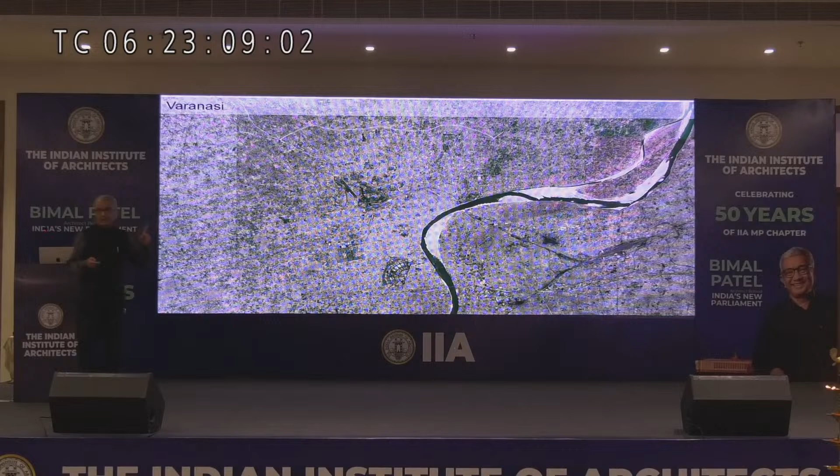Unfortunately, when these LED screens are used, the slide gets distorted a little bit. The projectors work much better. So pardon me for that, it's a little distorted, but the whole slide is here.

Just to start with, this is Varanasi, that's the Ganga flowing from down upwards. You can see the city all around here. That's the entire city. That's Banaras Hindu University here that you can see. And we are interested in this little square here. Okay, that's on the banks here somewhere, at this place, as you can see. And that's on the Ganges. This is the area in which the Kashi Mandir is.

You can see this is entirely a dense walled city, and that's the square we are interested in. Here is where the Kashi Mandir is. That is out here, you can see, and that is the Gyanvapi Masjid. You can see surrounding it is a dense settlement of the old kind. It's become denser over the years. There's lots of small gullies you can see.

You can see one important road on top, which is a 40-foot wide road. It's not very big, it's full of traffic usually. And there is the Ganga river there. At the far end is Manikarnika Ghat. This is our most important cremation ghat. And inside all of this is lots of different temples and various things happening there.

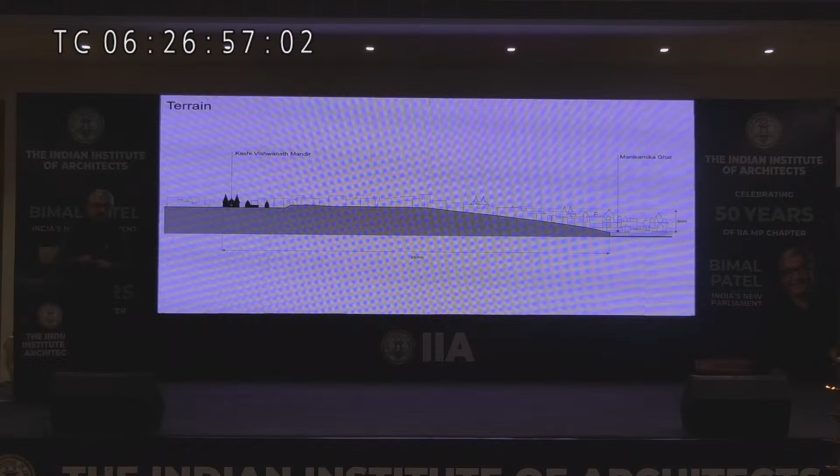It was meant to be a temple on the top of the hill, but there was a great desire to connect the mandir with the ghat there, and for the approach to be from the ghat, because people can come from there the best. You can also come from the gullies or the street, but a lot of pilgrims want to come from the river, by boat, and then climb up to this place. So our brief was rather brief, it didn't have much detail in it. Just saying we want to make a connection between the river and the temple, so it was sort of an open-ended brief.

There was no absolutely fixed program. And of course we want to make lots of pilgrim facilities and want to ensure that this area has enough security and safety for everybody. So these were the sort of very rough things we were told.

So if you look at the precinct all around, it's quite a messy place. Not all of it is ancient - actually, very little in Varanasi is truly ancient. Varanasi was built a lot 400 years ago, and lots of the buildings you see on the ghat are no more than 250 years old. Historically, it used to be quite an open area earlier.

But lots has been built, and subsequently you can see lots of construction has been done. There's lots of concrete, lots of brick, lots of buildings have been added on. This was an old place which got denser and denser and denser. So it's densely built - that's really the important character. It has very narrow lanes, has very little infrastructure there. It's quite a mess actually.

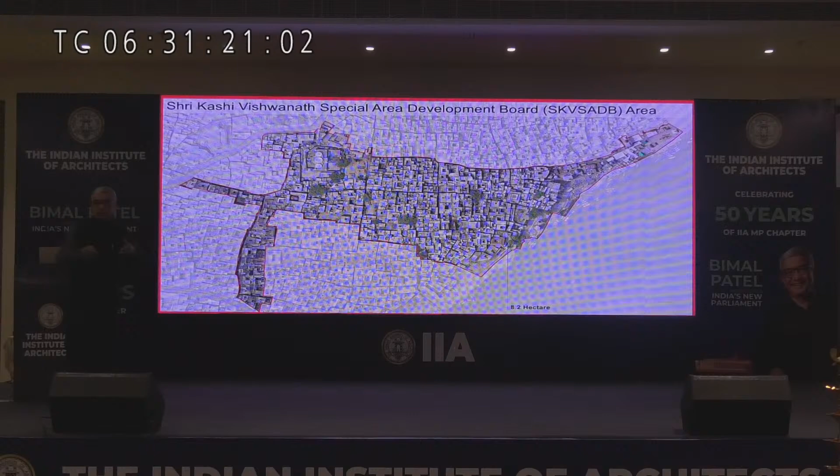This was an important first step, which is what we told them - that unless you do this and create a separate authority, you have no jurisdiction except on the streets. So you have to do this, and that was a good thing. So we prepared a master plan for this area.

As usual, we start with a sort of measured drawing of the area. These days you actually start off with a Google image, whatever you can get in your hand, and you start drawing, because drawing tells you what you must look for more.

So we started with this. These days, 3D printing technology allows a lot of things. Google is a wealth of information - many of you might already be using it, but it gives you three-dimensional information. So this entire thing can be built up with just what you get from Google. There's no survey done for this, you just download it from the net and build something like this, which is truly amazing, and we should use more and more of that.

Then we started the sketches and started seeing what's possible out here, how much area do we need, how do we connect the river, those boats out there, what are the important things. You know this process, I don't need to explain it to you - you keep drawing it, people keep questioning it, showing it to the clients, etc.

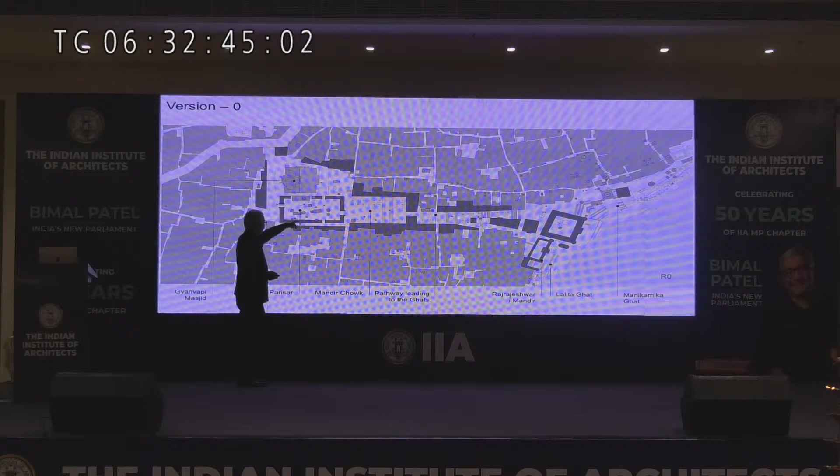And we came up with a version 0 master plan, which said our basic move was to create a sacred space around the temple, create a civic space, and then create a walkway leading all the way down. As soon as we did this, simultaneously the process was going on for purchase, not acquisition, of the houses in that area. Demolitions had started, and this was the model we came up with first, saying something like this can be done. So this is really the very first rough model that we did.

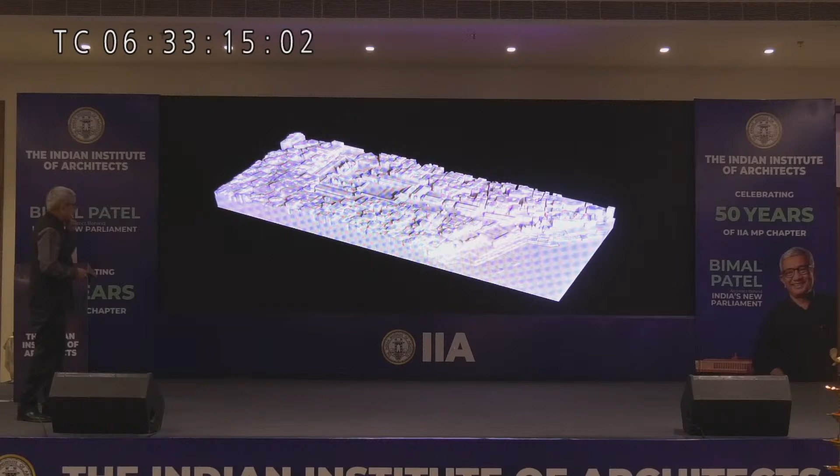But the demolition started, and we found that in many places there were temples hidden away inside the dense settlement, which became available. And we had proposed buildings where there were temples, so now the master plan had to evolve and change.

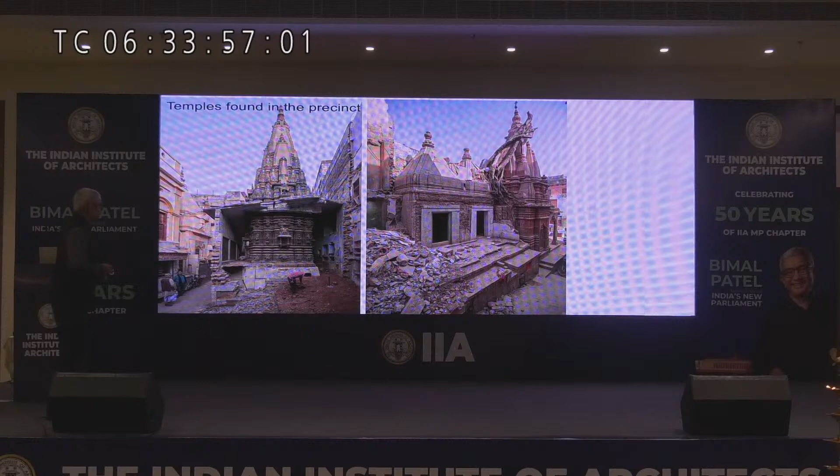As you can see here, this was not done in ancient times 300 years ago - this is done in modern times. So it's the same people who were living there who have really abused that area, it's not as if this is abuse since time immemorial. You can see here a concrete slab resting on a temple, these sort of things. And we found all the temples wherever we had proposed.

Some basic ideas were in place, but all the buildings were taking different shape as we got more data from the site. Remember, it was not as if we had all the data and then we designed - we were designing, collecting data, and going ahead. Here we thought version 7 was perfect, and by this time actually construction started. Then we decided that we were going to change something.

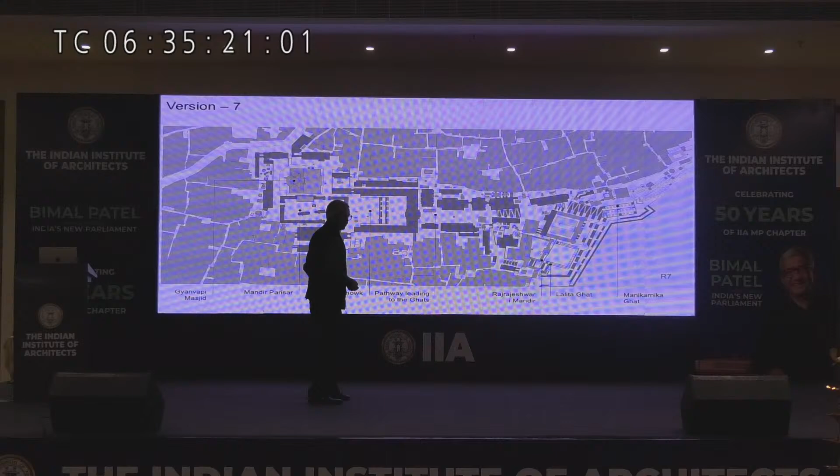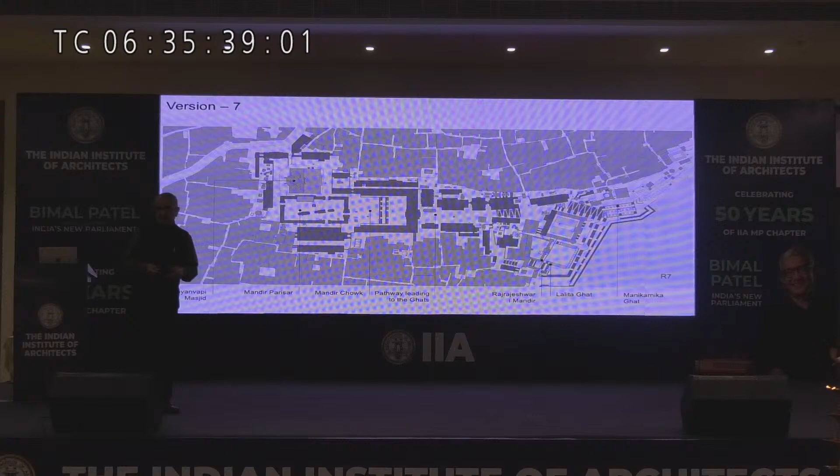You can see that the real key issue was when you come from the boat here, there's a pinch point, and from that pinch point you have to go inside. One day I was on the site when somebody suggested that this is an old structure, but it's not that important - suppose you remove it, what would happen? It immediately became clear that if we removed that structure, which was not an old ASI structure and did not have much religious significance, we could really change something.

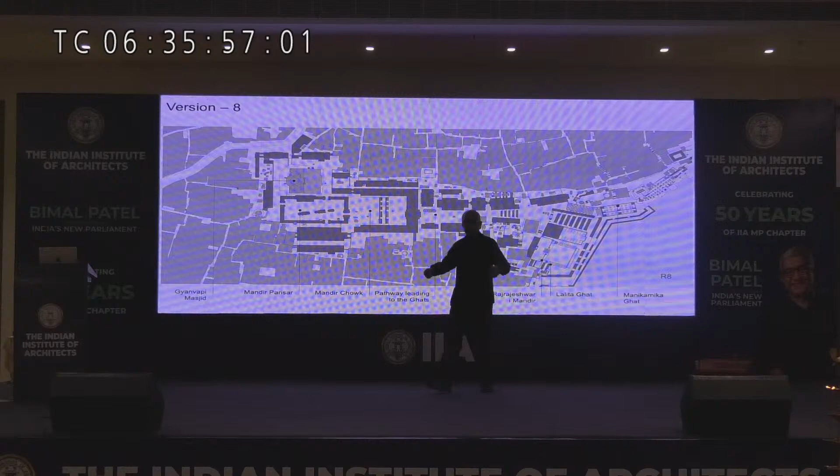So this was the old structure that was here, and if we removed it and made it smaller, we would get better steps going up. So from the ghats, we could climb up a grand staircase and go upstairs, up the hill. We made a model that looked like this, and said you come here somewhere, go up. But half the old structure we kept, something that looked like the old one.

Then we made an even bolder change, and we said, remove it completely. We removed the whole thing. This is what you get—a really grand set of steps going up. So this is where it evolved.

By this time, mind you, the construction had started, so this had to be additional work and had to be approved by somebody imaginative at the top, which we had. So that's the final master plan as built today, and you can see what it is.

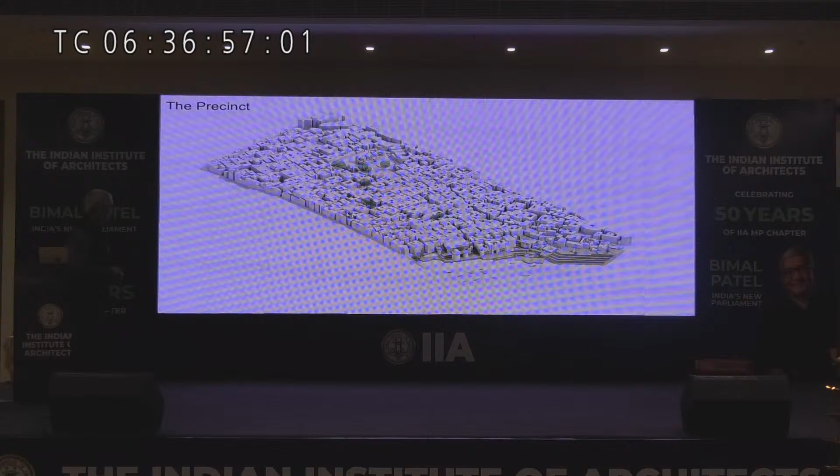Now let me explain to you. You can see the plan of the buildings—let me explain in a little more detail. This is the precinct as it was, and this is what we have transformed it into. So I go back once—you can see what it has been transformed into.

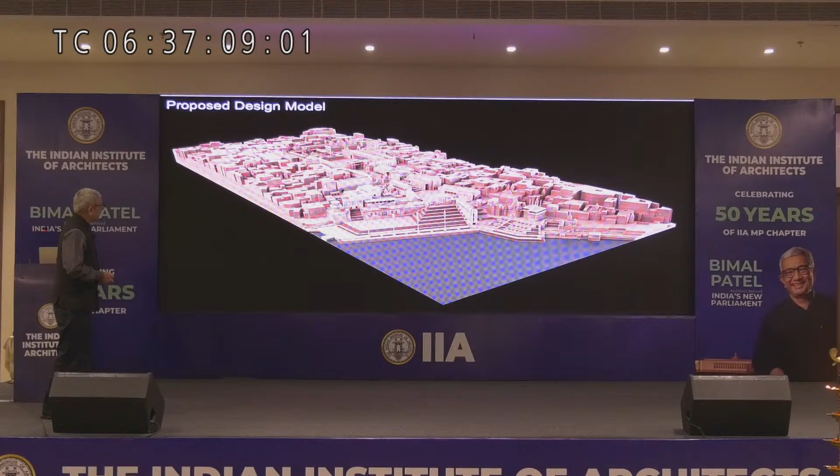Here's another model of the same thing that explains what the buildings are. This was a dynamic model, kept changing as we went along. Actually, the first one, the thermocol model, was the big one. Then we kept refining this. Here you can see some more of it.

Okay, so let me explain the precinct plan here. Now, this temple is actually a very tiny temple. How do you bring it to the foreground? How do you make it center stage? How do you give it some presence there? That was the real architecture problem—I mean, you understand very well, it's a tiny temple.

So we decided to adopt a strategy that is used in many temples all across the country, that you make a parisar around it, a sort of an arcade around it, create a sacred space around it, and that gives it a little more presence, frankly speaking.

This, compared to the mosque there, needed to have some space by itself. So it was like this, right? And this is what it looked like. This was the actual area of the temple—there was nothing more beyond this.

So then we took this and said, okay, that's the axis, but we shouldn't use that axis—we want to go down this way. So we took a square like that and straightened it out, so it sits a little bit tilted inside that square. Then the Gyanvapi well is there, so we added that in, and this became basically the dimension, 75 meters by 42 meters, within which we could create this parisar.

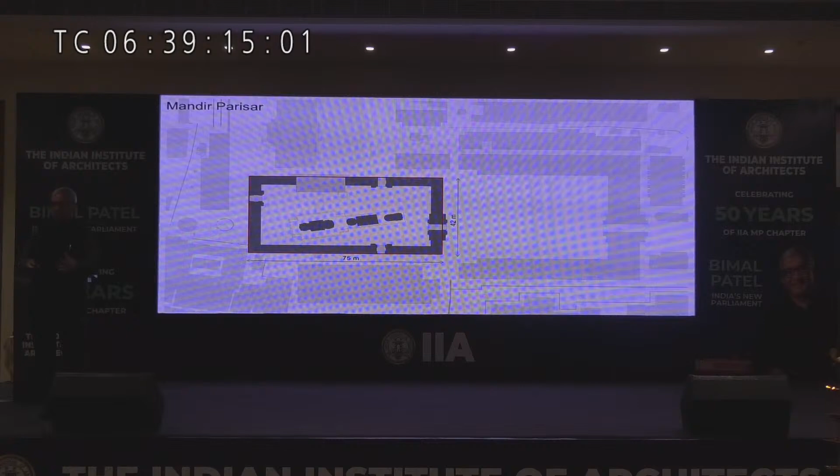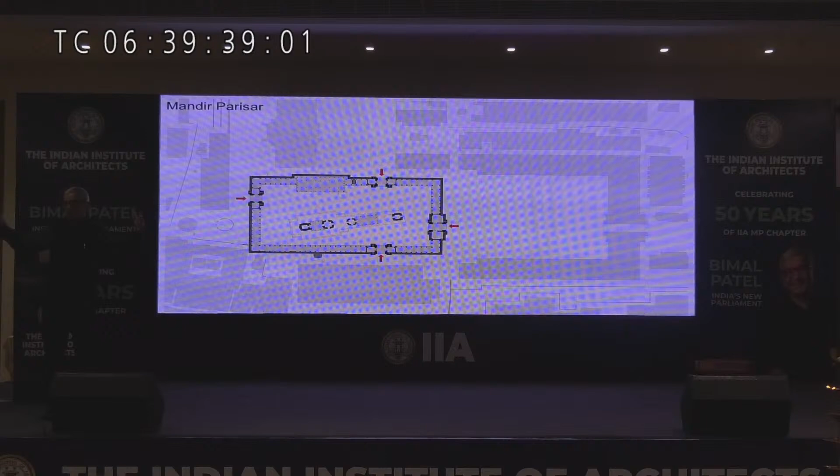So we started working with a temple architect, and he was associated with the person who was going to actually manufacture the stone material. So we started drawing up—he knows what modules, he knows how this works, because all the stone is going to be cut in a yard in Mount Abu and then transported to this place and assembled on site, because if you want to do this fast, you cannot do it there. It's actually made all over—it's a marvel of technology that you can do this today.

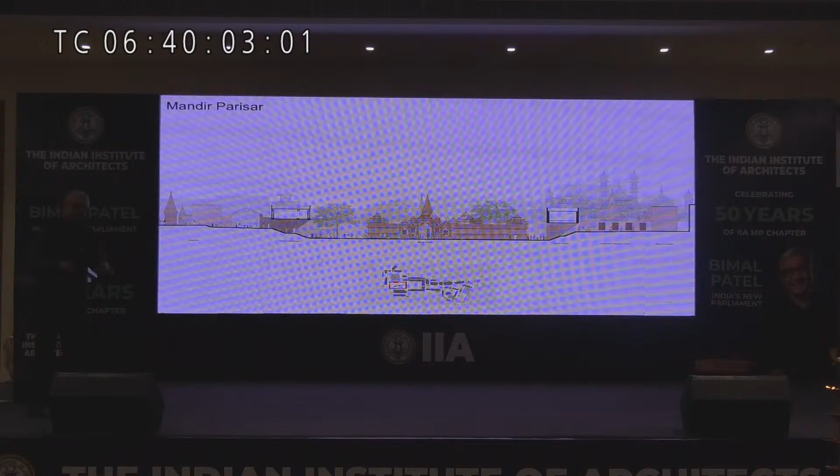And so that was the temple, that was the parisar that was designed. You can see the gateway. We worked on this with the architect—I could say things like, listen, I don't want so much, leave the middle a little blank, let's keep a heavy bottom, heavy top, and these are quite amenable. But he knows how to turn it into reality—so that was the actual design.

Then this is as it is built. You can see this is part of the temple, the gateway on the left hand side, here's the temple actually, and you can see the parisar all around. Inside there's marble flooring. Here you can see again the temple and the space around it.

Here's another view, the main gate where you enter from—that's actually a lot of space inside, gives you some sense of it. And all of this is actually new—it's all CNC cut stone. And here's all of this.

The gates are all new. All of it—the basic pattern and decoration was done by the temple architect. The rest of it was done by us to try and put it together.

Then outside the temple, we decided to have a large open space. Now the topography of this, I already told you—you climb 100 feet and then you go down, so there was one upper level, one lower level. We had some steps there, and many people come to this place. There was no place to sit down and spend some time—earlier you just pushed right through.

Even now there is a bit of pushing through, but if you wanted to sit somewhere and wait for a while, there was no place. So that's what the civic plaza is for, Mandir Chowk as we called it. That is formed by this U-shaped building that we put here, which has the temple trust. We said it could have the trust offices, some shops, maybe a handicraft shop. Really the program was made on the fly as we were going ahead.

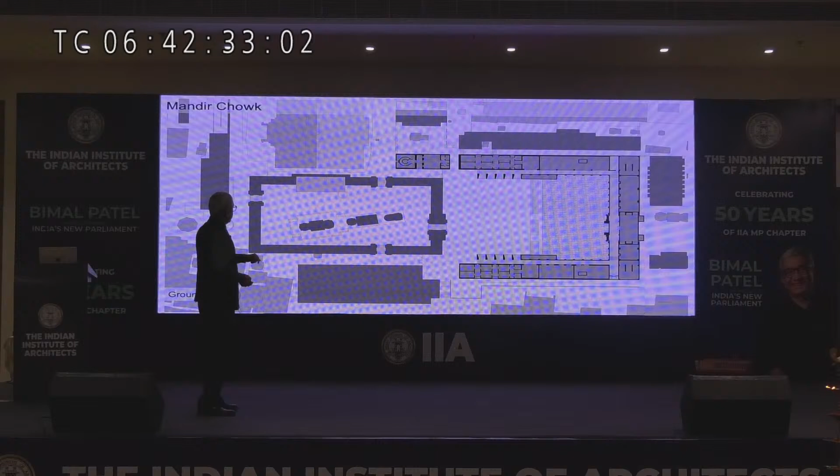Here you can see this is the lower level, the level of the temple. Outside, on this side, these are just toilets, washrooms for people to use. You come down those steps, and so it's just holding that space. Really its job is to create that middle space.

This is the level above where you arrive actually. That's one floor higher, and there's an arcade, there's an emporium, that's where shops can be. That is what was imagined. And then above we could have an exhibition gallery and various such things.

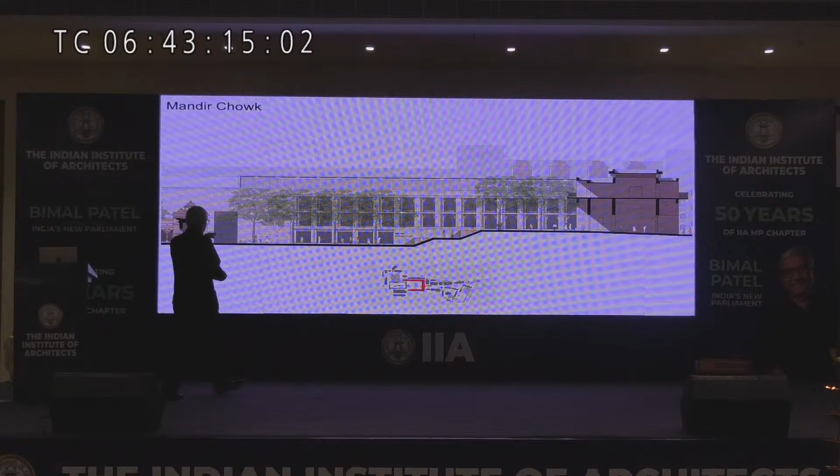That's a section. Through that civic space you can see the key diagram below, the red one. It shows you the arcade at the back. You arrive at this top level, climb down the steps, and those gaps behind here are where the washrooms etc. are. So these are essentially to create facilities for people.

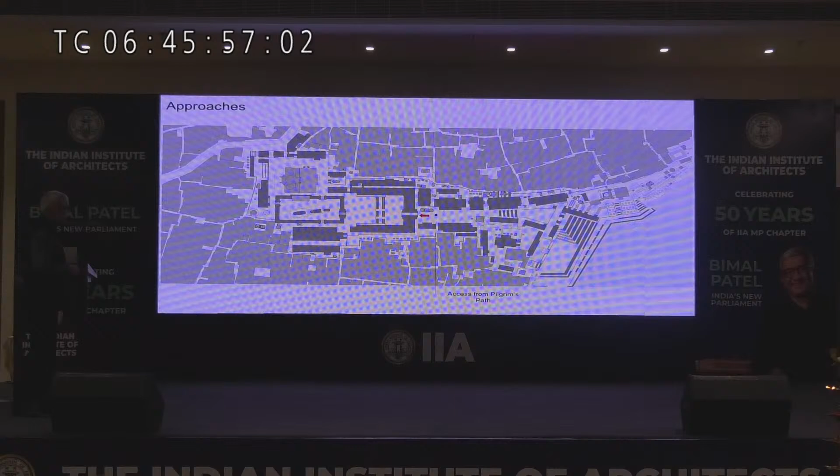This was the route for the pilgrim's path from there. And this is the area - you can see the gate here lining up with the axis of the temple there. So when you came to this gate, that's what framed the view. The whole point was to come up the Ghat, and at every point your journey is punctuated.

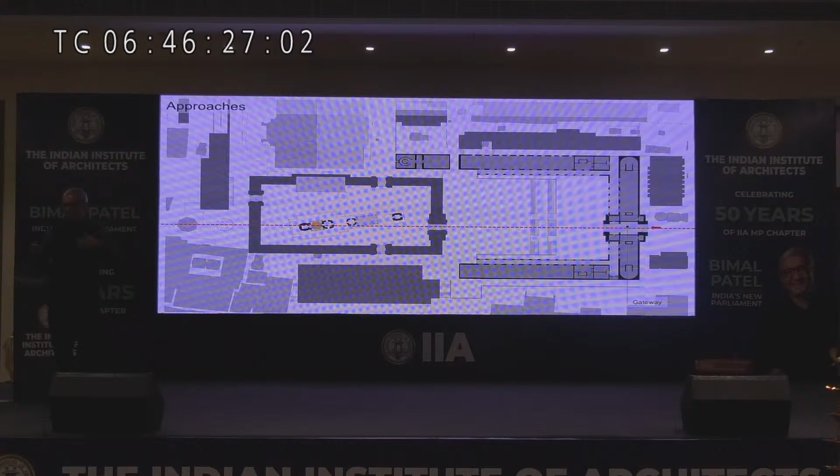First you're at the Ghat, then you see the gateway from the river, then you continue climbing up, full round, come to the next gate, you see the temple, then you come to the Parisar gate. There are 3 gates that lead you up essentially, and that's the gate you would come to. You see the temple at the back.

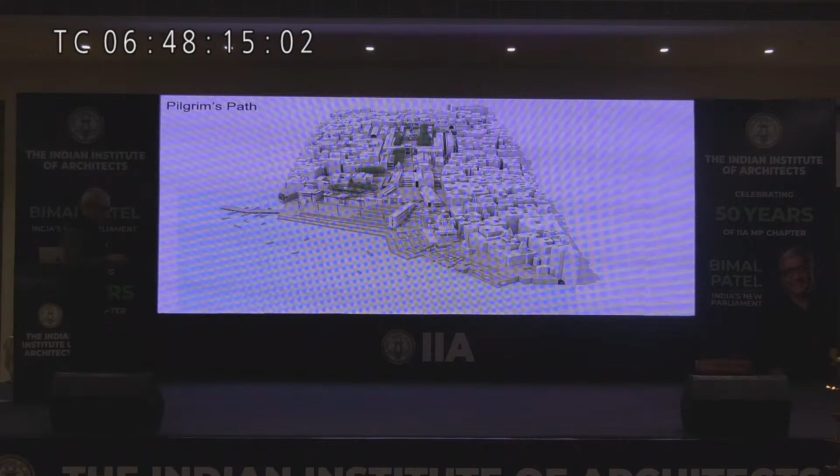And then the first gateway you can see, the second gateway, and the third gateway is right next to the temple. You slowly climb up and progress towards the temple. Here's that whole route, some early sketches at that time. We were trying to figure out what that route would be like.

The most important thing was the tourist and pilgrim facilities. So here you have a tourist facilitation center, then you have the Suvidha Kendra for Yatris, where you can leave your shoes, leave your telephone, mobile, etc., and go up. There's a food court, there's a guest house, and two more, because there are lots of tourists, so you have security to be managed. So it's lots of logistics of this sort.

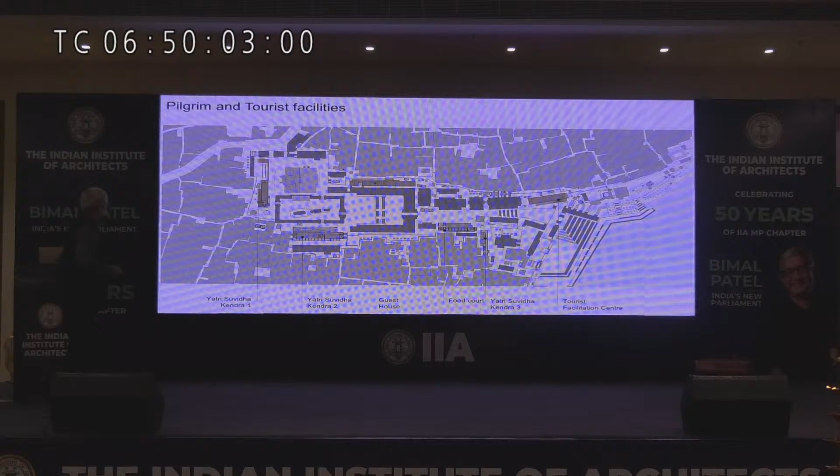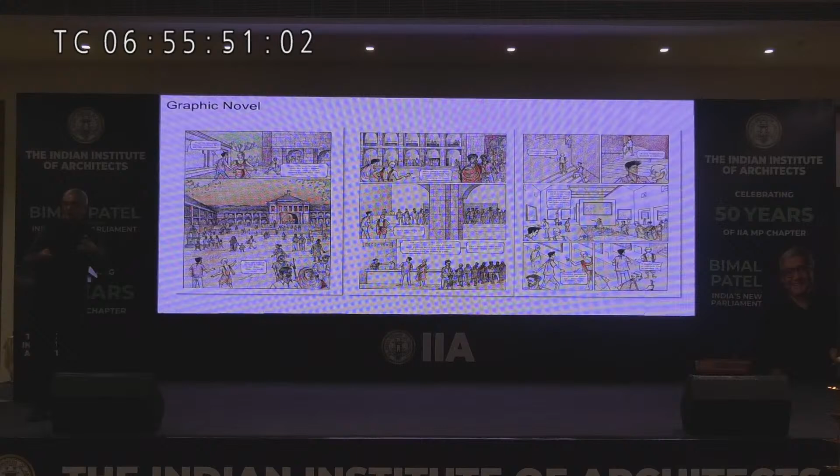So here you have a boy, a modern looking boy who comes into Varanasi and is wondering why this place is like this. He meets this old man who takes him around the city and shows him the mess that it is in. Then he goes to the other side of the river, takes a dip, and when he comes out, everything has been transformed. So this was just a fun way to explain the project to people. And here you have the boy and the old man in the new Varanasi.

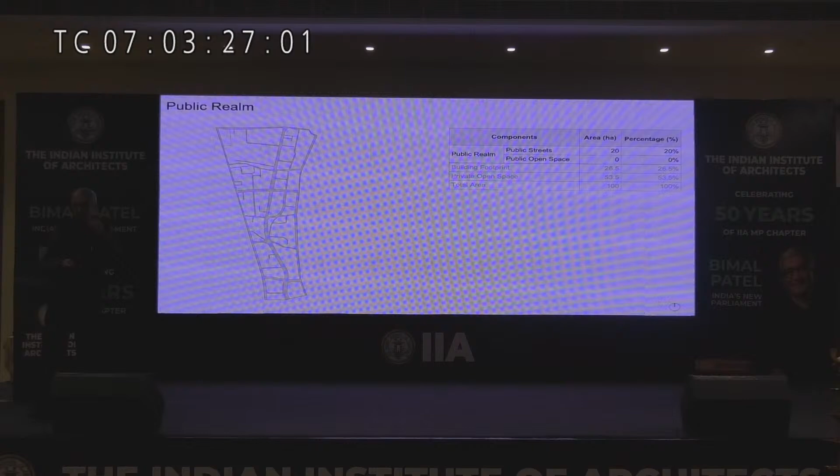But in the case of Ahmedabad here, we have 20% of land in the public realm. Hold that number in your head. That's just 20% in the public realm.

The next category we must ask is what is the building cover in a city. Like in a forest, you ask what is the forest cover? It might be designated forest, but what's the actual forest cover? You count how much canopy of trees there is. Well, we should ask how much of the land is covered by buildings. Why? Because it tells you how much ground floor space there is in the city, and ground floor is a valuable commodity, which is why it's priced high. Anything that is valuable to people, you should try to maximize.

So this is also a category you should maximize. Another reason is that if you have a larger ground floor, you can stack up more floor space without going too high. So if you decided your city will only be 4 or 5 floors high, and you had more building cover, you would put up more floor space. You wouldn't be forced to build tall, essentially, if your building cover was good.

Hold that number in your head, it's 26.5%. The remaining 53.5% is very familiar and very particular to Indian cities. Not many other cities in the world have something like this. It's all this private open space, the space around buildings, inside compounds. The reason it's left open is because the bylaws require you to keep it open. Because in a center city area like Ahmedabad, if the bylaws did not require this, people would build on it, since ground floor space is a valuable commodity. Why would you leave the land open at all?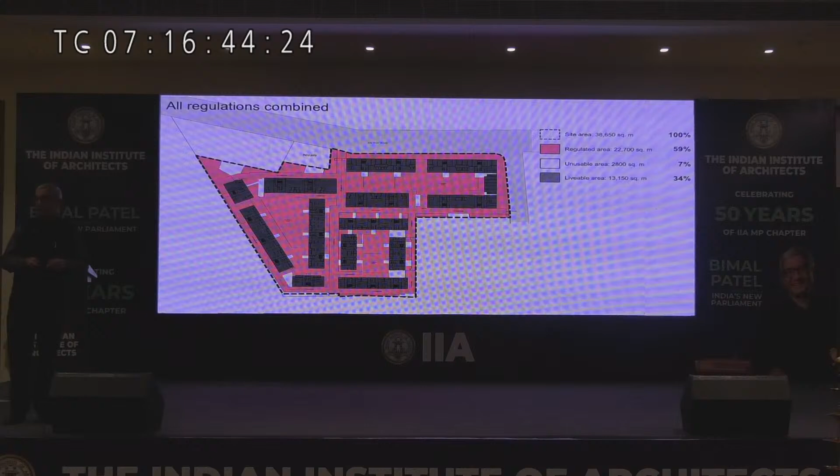Not much sense—you have a plot of 100 square meters and only 34 you can build on. This is not how all those other cities I told you work. Actually, we have done, I could show you another presentation of how this would be done in the Indian context, where you could allow people to use 80, 90% of their plot, but you have taken away a lot of the land for the street and a lot of the land for parks.

So architects have become what excise lawyers used to be, right? There's a tangle of regulations, complicated, and you have to be conversant with all the regulations. This is like a lawyer, an excise lawyer, who knew all the intricacies of the law and was then expert at exploiting loopholes, sometimes in quasi-legal ways, finding convoluted solutions. This is not where our creativity should be used. Our creativity should be used to optimize things for clients, not to tackle the mess of regulations. And we should put our creativity elsewhere.

Okay, why are Indian building regulations the way they are? Well, because nobody has really given them much clear thought, at least not from an efficiency perspective. Okay, they have given it thought—every time they sit down with the building bylaws, I say, oh my God, we're going to add another one. And I've sat in many discussions where somebody comes up with a good new concern.

They say sustainable development goals require us to have green cover—okay, another 10% gone. We cannot have a fire tragedy happen—another High Court ruling, another new regulation made. So this tangle of regulations keeps growing. It's a nonsense way of doing things.

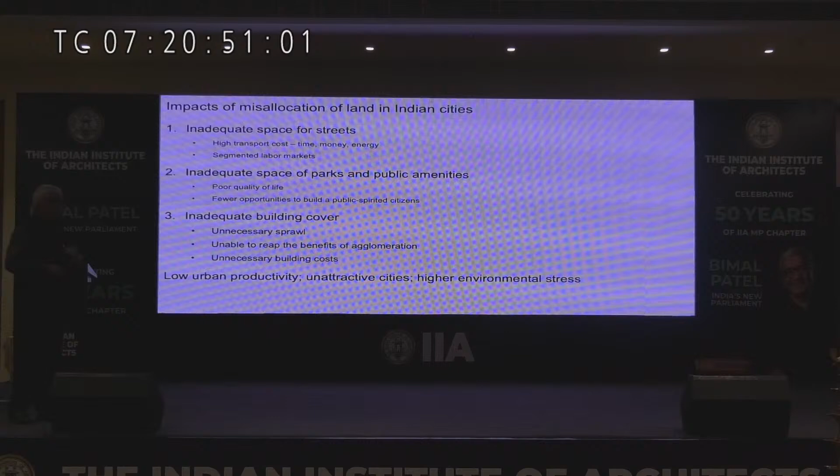Now, I can tell you this from experience—there are many good public spaces, there must be great ones here where people meet, where everybody goes for a walk in the morning. That's where the mindset of a modern nation is built. We have inadequate building cover, and therefore we get unnecessary sprawl, and we're not able to have agglomeration benefits.

So basically we get low productivity, unattractive cities, and higher environmental stress. How can this be improved? Now this can be improved in a very simple way.

Stop using text-based rules. Some people call this form-based codes, but I don't like that term because it has a very specific American meaning. I say let's use volumetric bylaws instead. Define the volume within which you can build, and then leave the rest, at least in the case of shape, height, and bulk of buildings, to the architect.

So instead of trying to clean up this tangle, take the portion of the book that deals with the shape and size of buildings and just throw it out. Use a new method where you actually draw out and demarcate the land that must be left open, instead of trying to define it through rules.

So when you're sitting down in an area with all the plots, just mark out how much has to be left open, and you'll soon find out how much you're asking people to leave open. Automatically your mind starts working on the cost side. Even if that work is being done by a public authority, as soon as you draw it up you realize, 'oh my God, I told this person he cannot build anything here.' Soon you start seeing it and you can improve things.

So we got a chance to do that in Ahmedabad. In the center of Ahmedabad, in this area, we created a densification plan. If you go into this same area and turn it around, that's the middle of the city. You can see once again it's a very sparse street network, only 22% land in the street, and we were interested in increasing the land in the street.

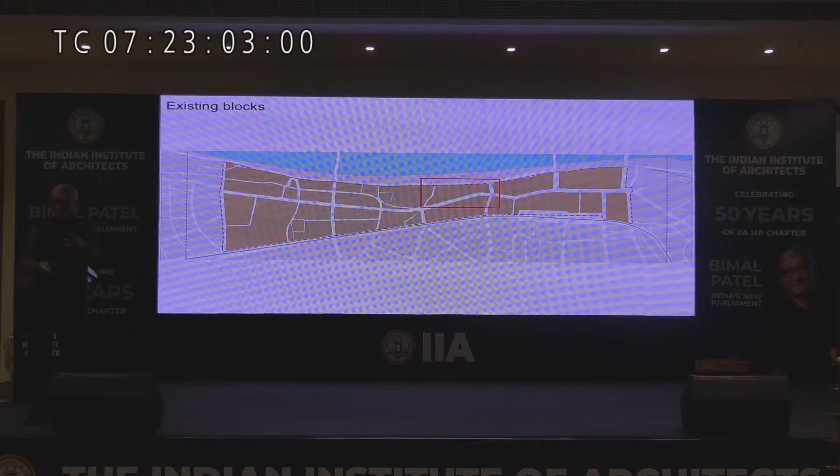Now when cities redevelop, when small buildings are torn down and new ones come up, that's a golden opportunity, because that's the point at which you can take some land away. So when some area like Bhopal is redeveloping, it may take 20 years, but from the beginning you can mark out, essentially, the setbacks, whatever you want.

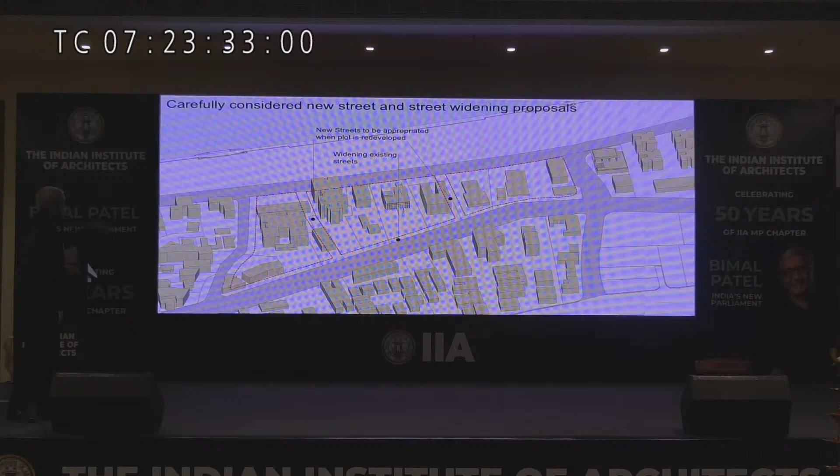So in this case we took this area, this block, a very big block, and marked out first all the streets we want in the future. We didn't say these streets in the middle are going to be taken straight away. When you redevelop, give us this land, and you get the FSI for that. So the person isn't worried about giving up the land. You can see that the streets widened as well as you get more streets. So that was the idea here.

And here you see what would be left eventually. Now we have to draw setbacks. The setbacks were drawn like this: whenever you have a neighboring plot, please leave a setback. On the street side, don't leave a setback, because you don't need to—the fire engine can come directly from street access. So you build right up to the edge, doesn't matter.

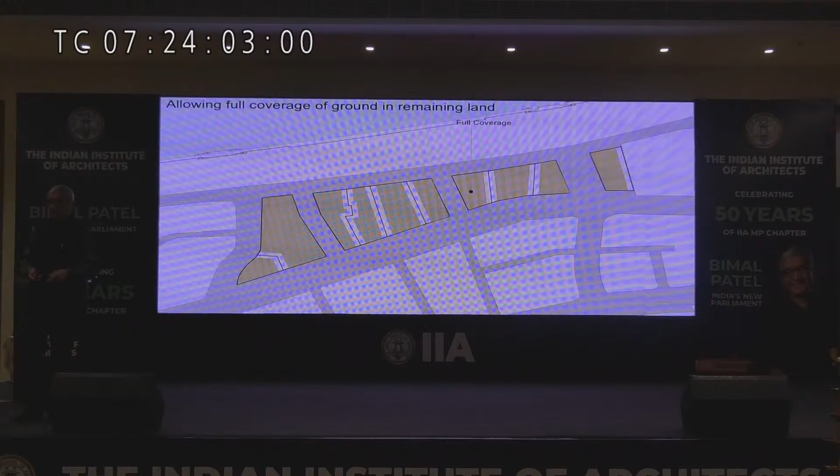Having done this, this is the entire coverage. You can see that in many of these plots you get 80%, 90% coverage. I mean, everybody loves that.

Then you define the volume within which you can build. So this is a development envelope, a dabba, within which you have a certain amount of floor space that you can build based on the FSI, and that's the amount of floor space you're allowed to build. This is the clay that the architect has to shape the building with. You can see the dabba is bigger than the available clay—there's a lot more clay available here. And obviously all the architects will shape buildings differently based on what their client needs are.

So within that volume, you have the freedom to shape the building the way you like, and you'll get buildings like this. I'm simplifying a very complicated plan, but essentially everybody will do this, and we will improve the street network of the city and get more street and more building coverage. And the bylaws will start looking like this—you'll still have text-based rules because certain engineering standards, etc., still have to be written in text-based form.

All the height and bulk regulations will be in the form of drawings like this. In the olden days, bylaws used to be a set of drawings plus text-based rules. Now we have only text-based rules. We need to go back to drawings like this, so you get a portfolio, look up your plot, and see what is available.

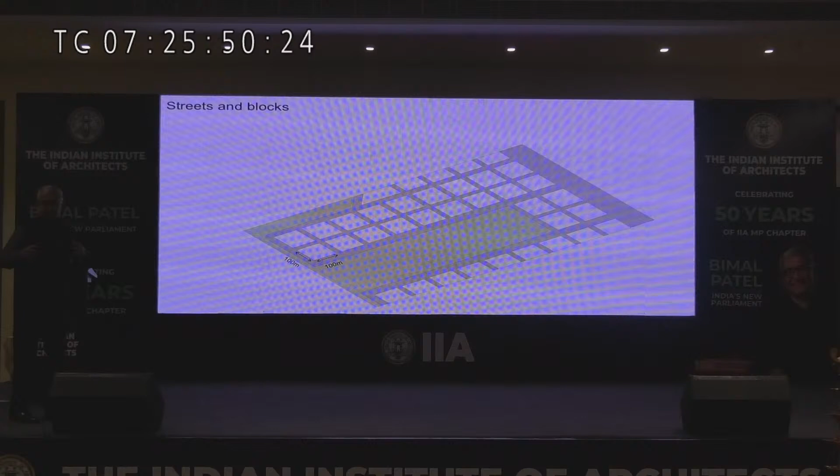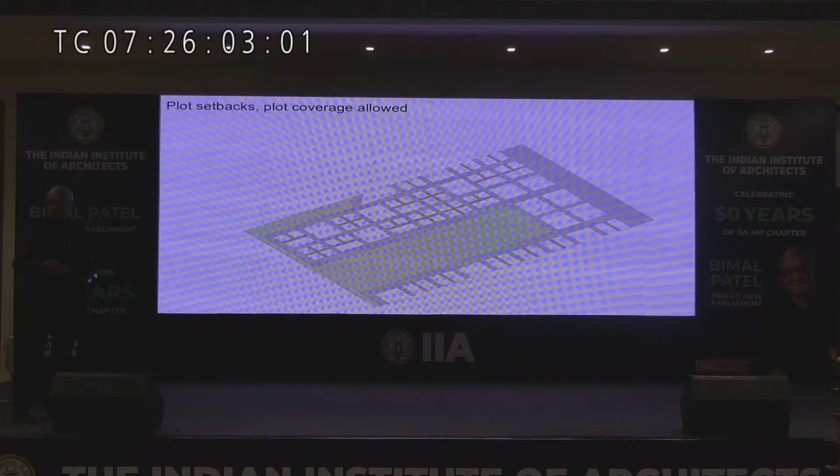Once the street network is there, you've got these blocks, because a street network consists essentially of streets and blocks. The blocks are 100 by 100, and these are the plots we defined inside, and the setbacks—these are the areas you have to leave open. On this is the building volumes, and the heights were decided based on some urban design criteria, because you get views to the sea or something like this.

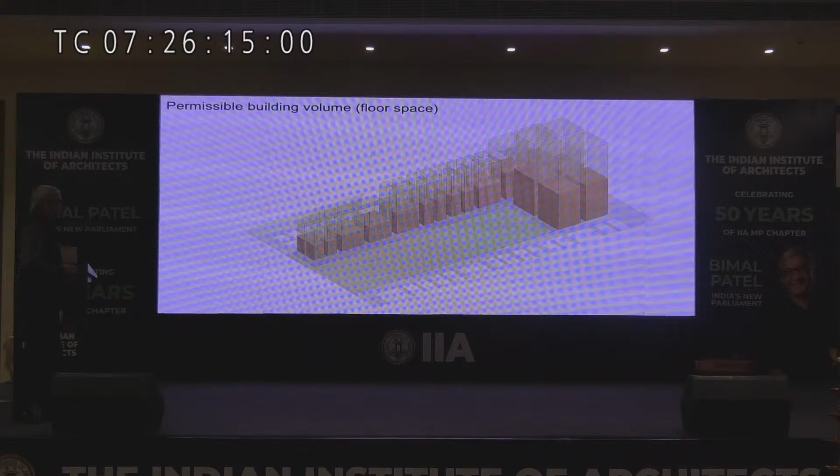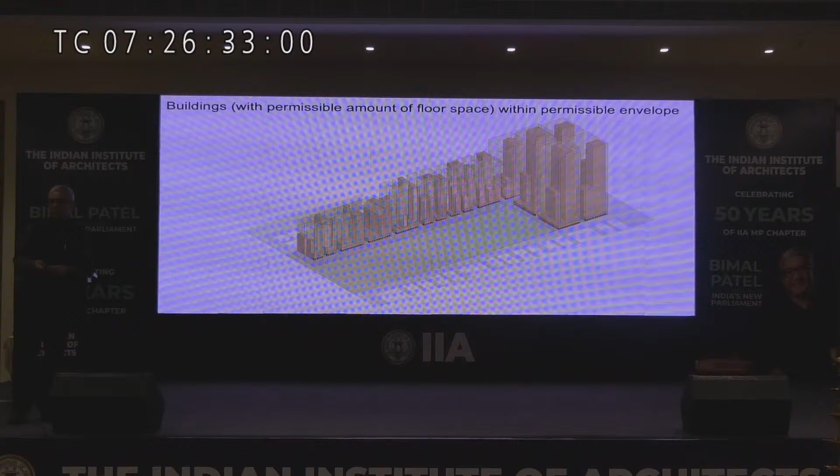Inside this, the amount of clay the architects had was this, and each architect would shape the buildings in some way or the other. We had some other rules, but they don't matter much, like arcades and things like that. But that's within the permissible envelope—this is what people will build. So that's the way you need to do building regulations, not these text-based rules. That's essentially the idea.

And here's the bylaws book for Bombay, which I hope becomes real at some point. The Ahmedabad one definitely has. So thank you very much.

If you have time for questions, I'm happy to take questions—if everybody's hungry. Yes. Brief something about Parliament. So what do I say about the Parliament? Let me see if I can find something here.

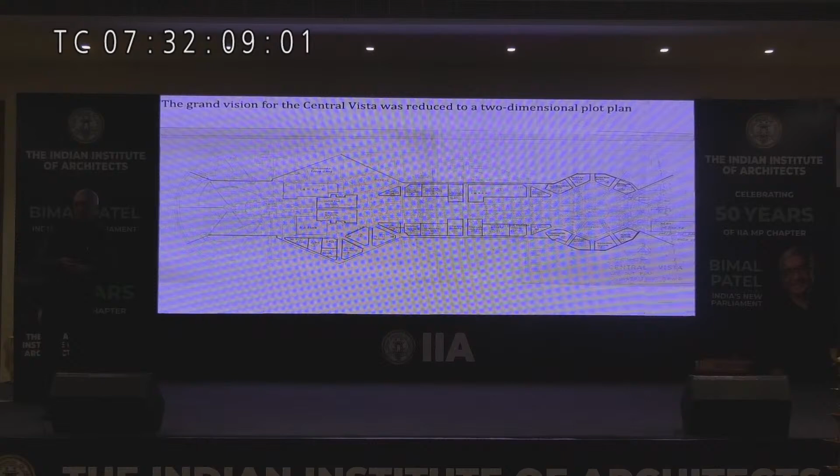Post-independence, management of Central Vista was not very good—we are not good at managing our spaces. After the 1960s, lots of things started getting added to this place. You can see barracks already built during the Second World War, right behind South Block here, and barracks were built on both sides too. One new street was created, new buildings were put in, but this whole area was not managed very well. It was not seen comprehensively—it was turned into a plotting scheme, where they were cutting out plots and giving them to different ministries to build whatever. So this has been neglected from the 60s on.

And this is what it was, and this is what we made of it over the years. You can see some old barracks here, and all these spaces. Many buildings. You can see the symmetry is lost. There is really not much. So this is the plan that we have proposed afterwards, and some idea of it.

These were the problems. It's a magnificent icon, there's no question about it. This is really spectacular when you go there. But these are a hodgepodge of different activities - administrative, residential, cultural, all sorts of activities put together in one place.

These were old barracks originally built for soldiers, and now there are offices inside, with many people working inside here. They used to look like this. You can see this is in the middle of the city. This is the most important space, being used for purposes that are not that significant, or don't need to be in the center of the city.

Incoherent architectural character - every building was different. There's no problem with it being different, but there's nothing holding it all together, not even any symmetry. A very poor use of land - most of it open, but still you cannot build anything on it, which is absolutely what I was telling you earlier.

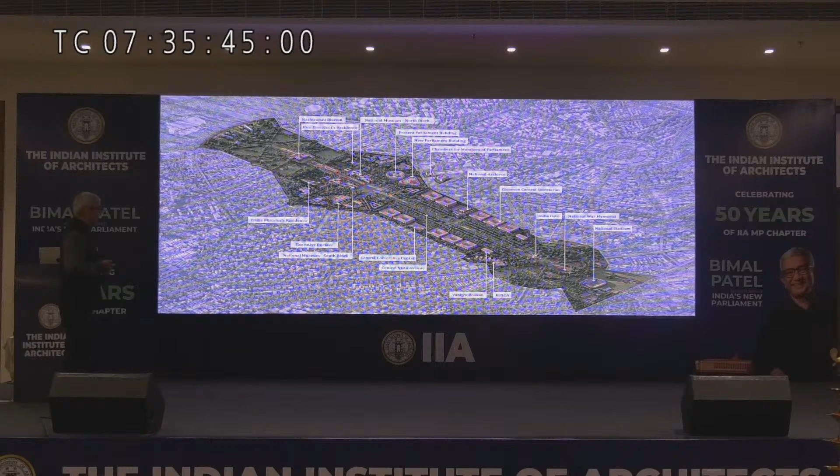And this was the idea that this would be built here. You can see a number of things - near the old parliament, the new parliament, and on the other side, the executive enclave, which would have mirroring on the other side, the PMO, Cabinet Secretariat, etc. On two sides, office buildings, and the full landscape in the middle to be improved and upgraded. So the objective was: Parliament's facilities to be improved, administration offices to be improved, cultural and recreational facilities to be improved, secure infrastructure for executive offices, residential facilities for the Vice President and Prime Minister, and protecting the heritage of this area.

So regarding the Parliament, these were early drawings - alternatives of the round Parliament. These were Baker's alternatives. It wasn't that he came up with the round one first - he actually wanted to build a triangle, this star-shaped one there. But Lutyens insisted the round one had to be built, and so this is how it got done.

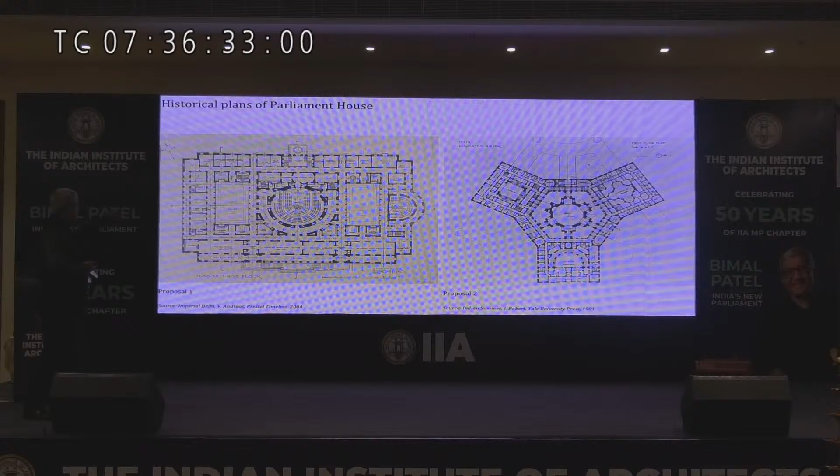They are very poor drawings. We had to digitize all the drawings, turn them into usable form, using archival images we could find. All the spaces had to be studied - you can see room by room analysis of what is in the rooms. Because we manage our buildings without a single map of the building - nobody knows how many rooms there are, how many people work there, how much furniture there is, nothing.

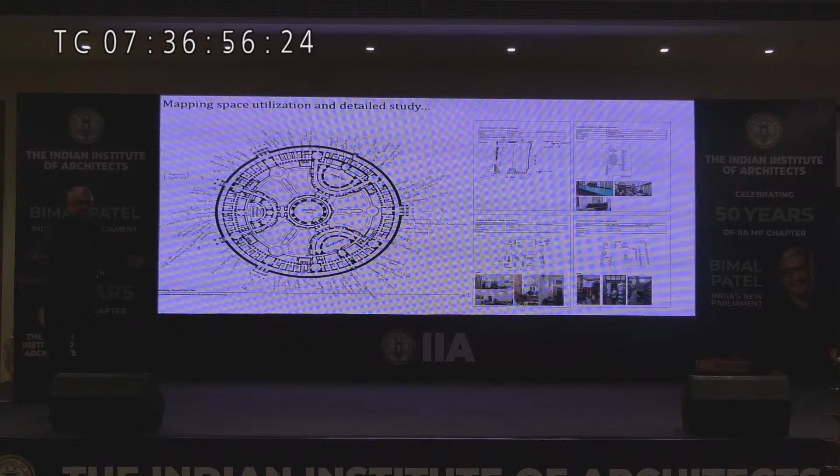So you have to go and measure. Every room you can see has been measured and furniture checked. All the old furniture was studied to see what we have. Here, studying expansion possibilities, it became very clear you cannot expand this. If you want more seats, you have to build a new hall, because you can see the seats go right all the way to the back.

Everything has been used up. This was meant to be for 150 people. There were 500 people using it, and now we needed 750 people. So there was no question. A lot of people said, why can't you keep the old Parliament? My friend, just do the arithmetic, it will not work.

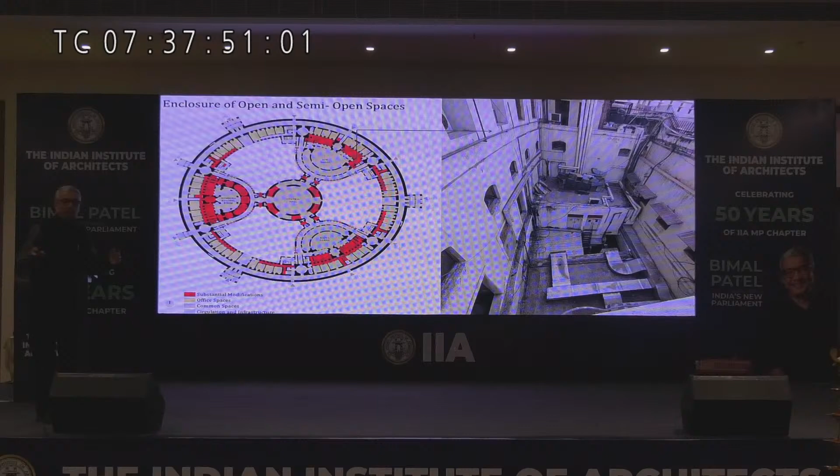So that was a lot of additions and alterations in the old Parliament building that you can see here. All of them had to be removed, because all these verandas have been covered, converted into offices. The old building has been mauled out of shape. You talk heritage, but only from the outside can you see heritage. The inside is completely a mess.

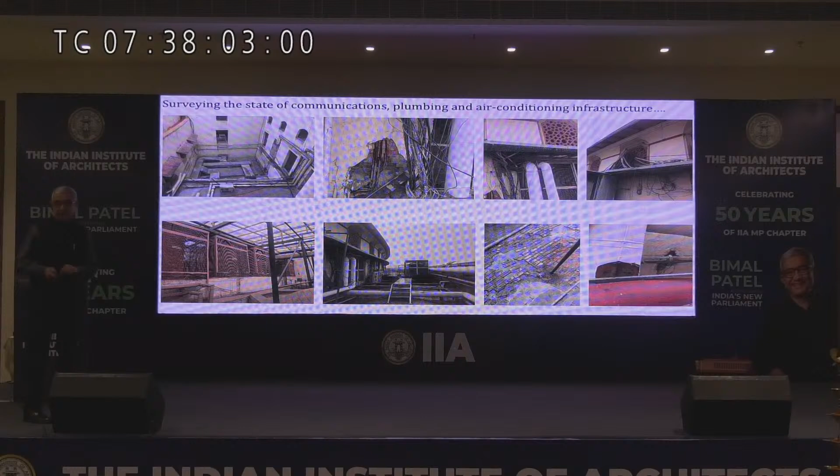The inside offices look like this. That's the kind of office structure there is. The infrastructure looks like this, okay? And inside the Lok Sabha, it's like our old trains, the infrastructure is very, very poor. And seismically, it was not good either. So it's a much valued facility, but we decided that something new had to be done out here.

For the design of the new building, we decided to use the plot right next to it. It's a triangular plot. Already this plot was being used by Parliament - there was parking, a reception building, and CISF barracks. Technically, on paper, it was a garden, but after the attacks it had been cordoned off and was being used, so there was no garden there. So we said, let's use the land a little better and put in a building there.

Naturally, the triangular plot, a triangular building made sense. It is a pure form. There are many, many reasons why this made sense. That was the sort of iterations of the design that we went through. We started with 3 halls, then came down to 2 halls and a courtyard. These were the elevations - the last one is what got built. And that's what is finally being built out here.

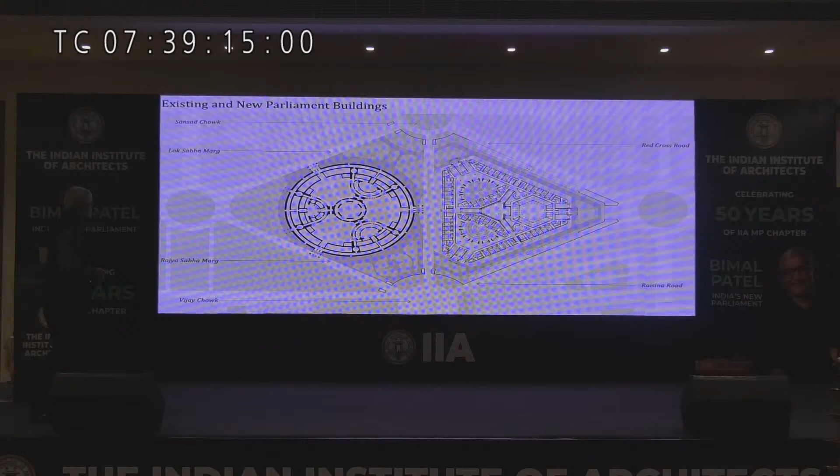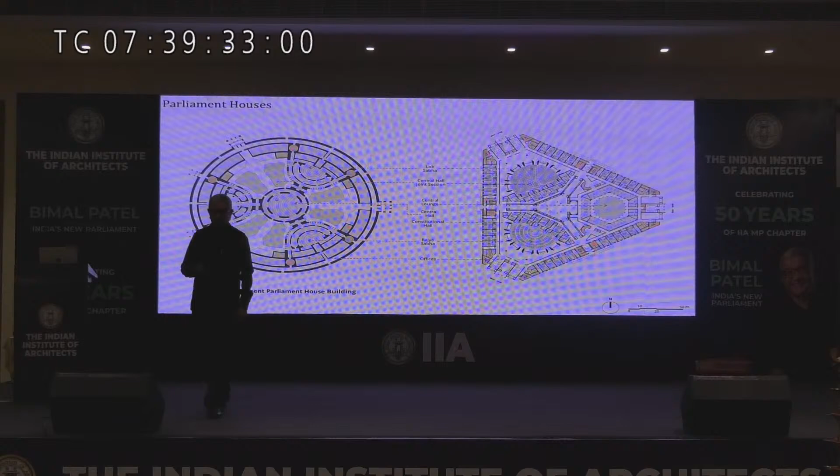The underpinning geometry is very strong, so the whole building sits on a triangular geometry, and we had to try different grids, because these sort of buildings require a very strong geometric foundation - like our temples, they require a very strong geometric foundation.

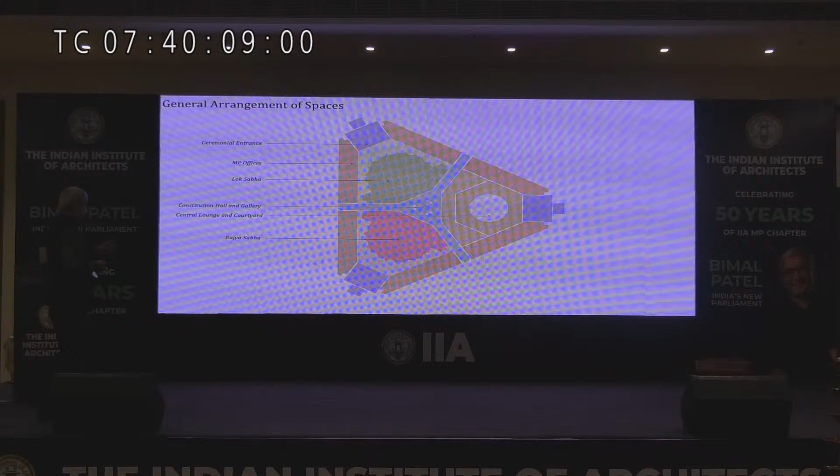Here you can see the green is the Lok Sabha, Rajya Sabha is red, yellow is the central lounge courtyard - this is where all the MPs can meet. On the periphery there are offices and entrances, ceremonial entrances, 6 entrances in total. The blue marks the entrances. And this is the plan of it.

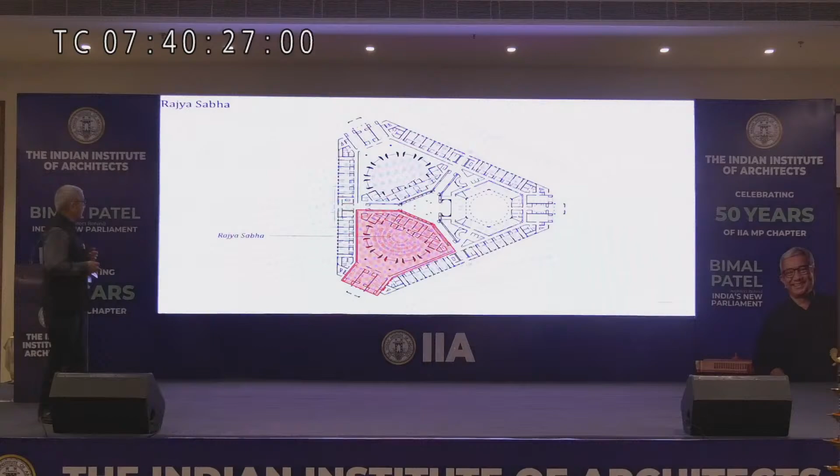If I take the Lok Sabha here, that was the visualization of the Lok Sabha. Now this is an old presentation, so I don't have, but you've all seen the final one in various images. Here's the Rajya Sabha, and this was its visualization done at that time. This was the central courtyard, and that's the dining hall next to it, the library. All of it looks pretty much like this, but now looks much richer and nicer.

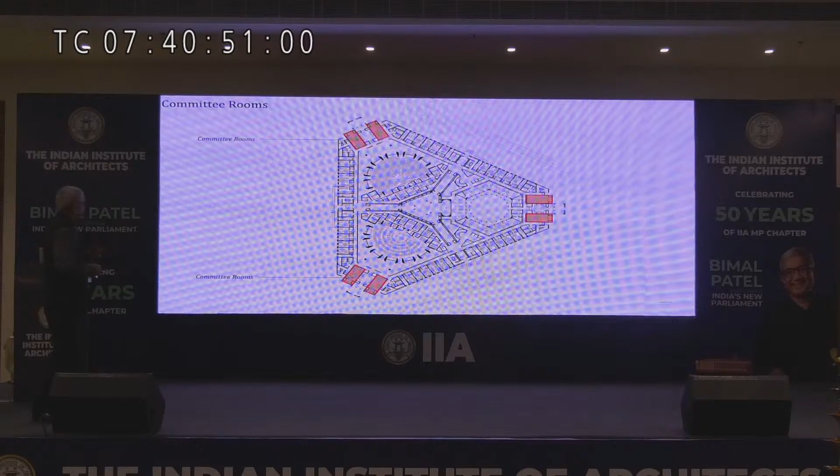So this is offices for ministers. These were the committee rooms, and these were the central hall, Constitution Hall. This is where the Constitution is kept, in this sort of a chamber, with light coming in from the top. There's a pendulum swinging in the middle.

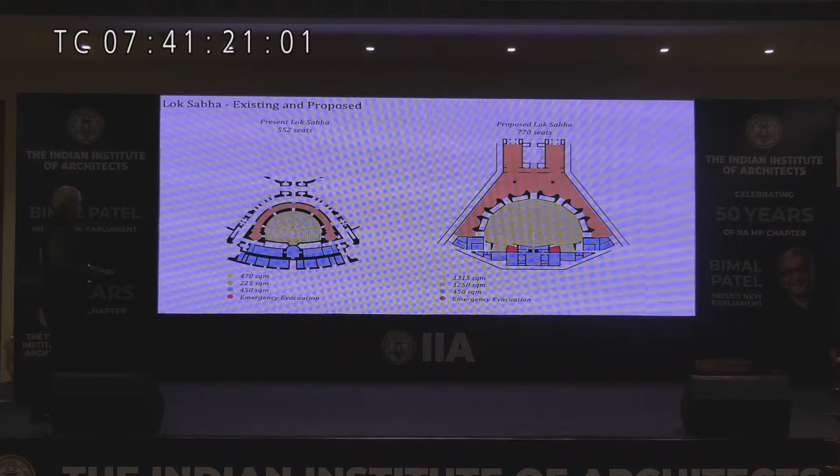Now some details of the Lok Sabha. You can see the old and the new - almost 3 times the size. The yellow shows 3 times the size for the chamber itself, and the lobby is much bigger. There's emergency evacuation improved, and if you take the seating, everybody gets proper seating here - you can see now they sit in a lot more relaxed fashion than earlier. These are bench type seating, but everybody gets a corner seat.

Lots of things had to be checked. Presently, in the old one, the leader of opposition and the Prime Minister couldn't look at each other clearly, so the well was sunk a little bit.

This is a 3D printed model we made to try and understand what this would be. This is the furniture being manufactured, the mock-up in the furniture.

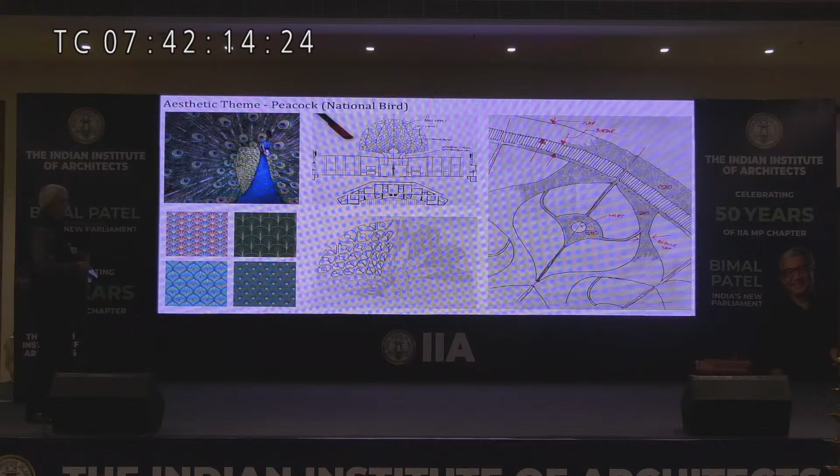These are images of - we decided to use the peacock as a theme for national bird, national flower, national tree. These are the three corners of the three buildings, and national emblem on top. And so here it is, the ceiling has a peacock pattern.

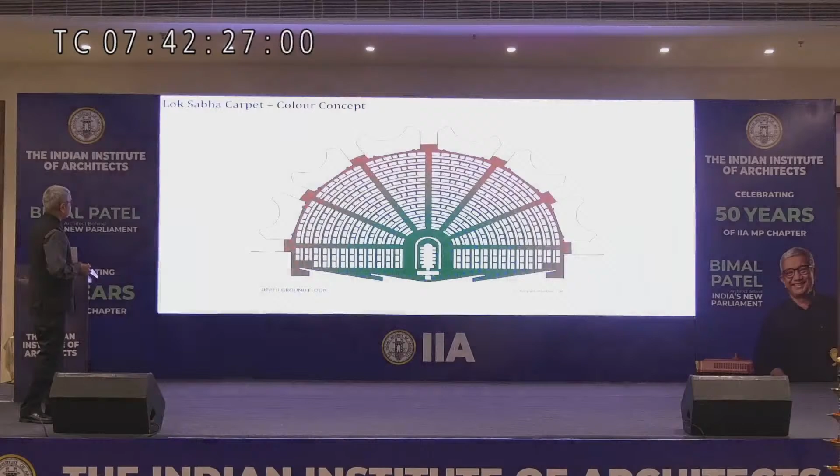This is the ceiling mock-up being done, and that was the carpet designed, the colors for the carpet. Here's the carpet samples being checked out.

That's my sister, Kenna. She does the interiors for this. This is the carpet being made in Uttar Pradesh. These are the samples for the carpets. This is the fabric that was designed by a designer in Bangalore.

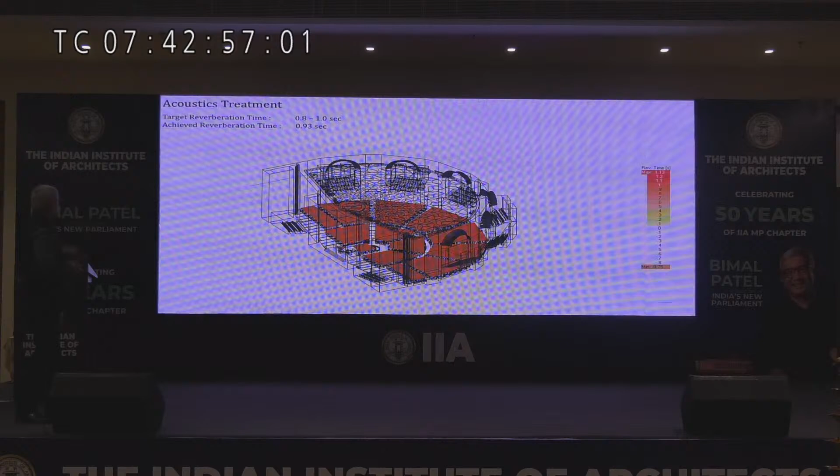And so the panels on top, which have the peacock motifs, those were tested out like this. The acoustics - we ran into a lot of trouble with this later on. All the audiovisual equipment had to be put in here.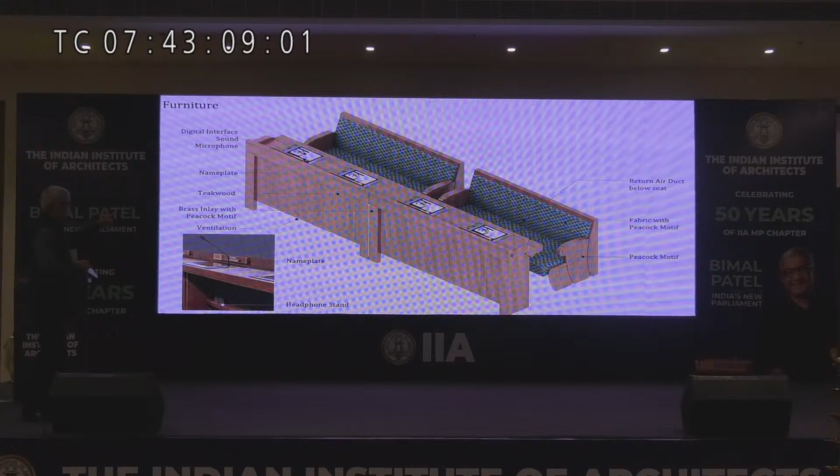This is the furniture, which was designed by Ismat, my wife. These are the desks and chairs for it. This is the mock-up for the same thing being tried out here. And these were the samples that were made, being checked out.

So it was quite an intense effort.

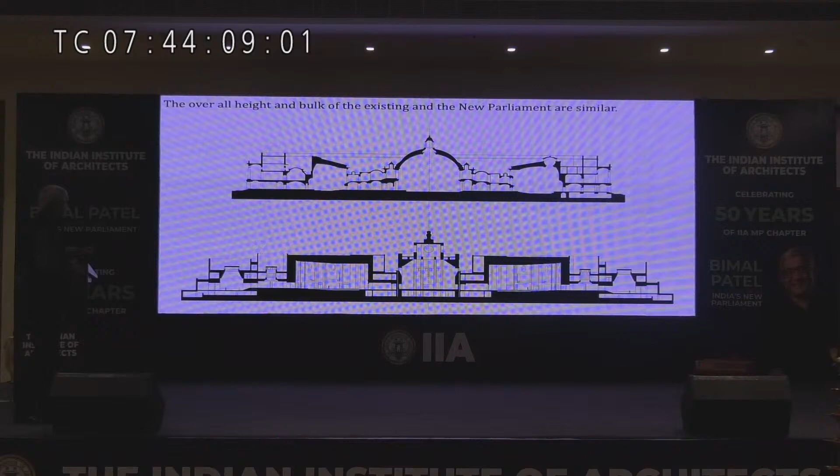Sections and elevations - you can see the section here on top is the old parliament, and this is the new parliament below. That's the elevation. We wanted to match the two buildings but not mimic it, right?

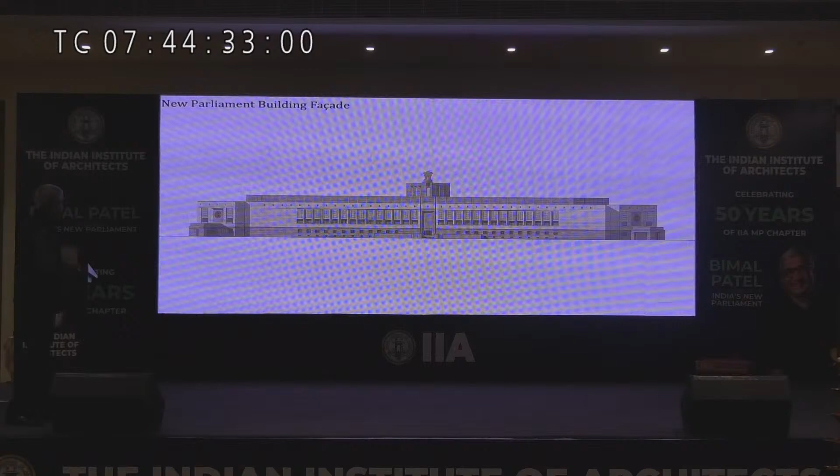This is the facade of the building. There's another facade. These were all sort of renders that we did earlier. This is how it has actually been built out here.

And this is the effort of 300 people. You cannot - I'm not talking of construction, I'm talking of design - 300 people.

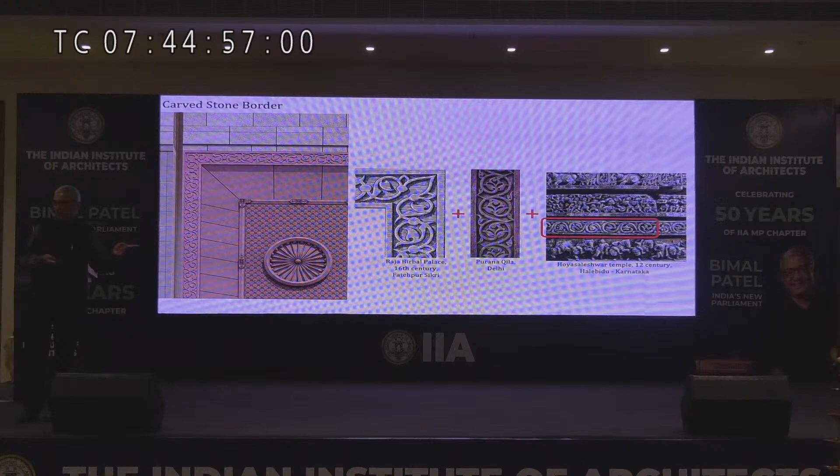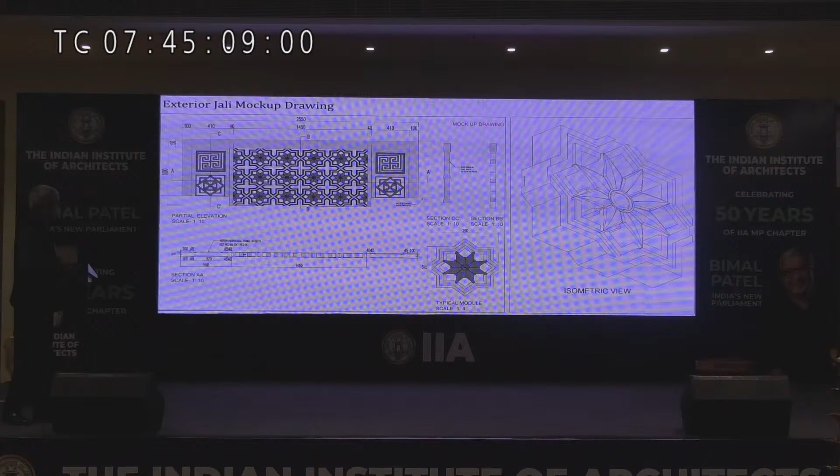Here are some mock-ups of the stonework that had to be done. CNC cut stone - how do you get this decoration right? Here are the drawings of the mock-up. Here the jalis being tried out, and infrastructure.

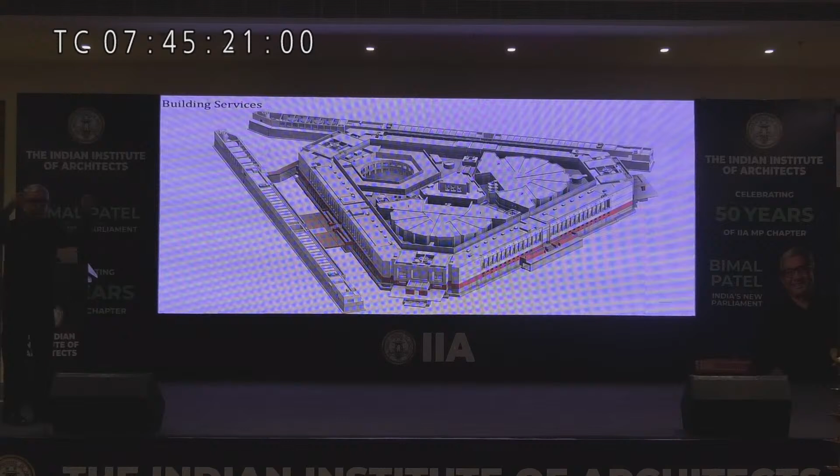There is a hell of a lot of infrastructure in this building. Actually, like modern buildings - if you open the hood of a car, inside it's all just machines like that. There's these pipes going around.

Chambers, so that's that, that's the Parliament. Then there's a lot more.

The building's finished now and there's lots more construction. So I'm going to go back and tell the office people to make a new presentation with things in it. So we'll do that. This is from '23.